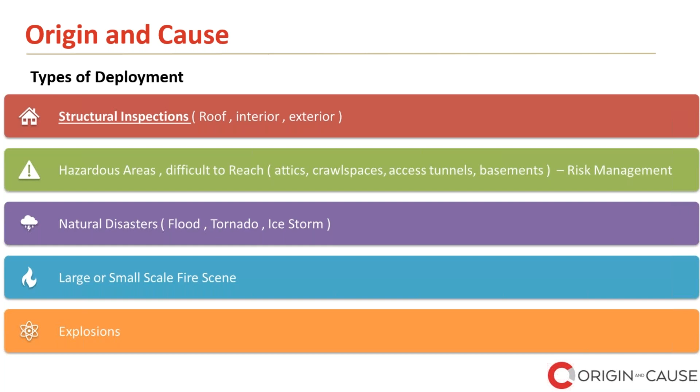Currently the regulations that Transport Canada governs drone use and drone pilots will expire as of June 1st. Things like special flight operation certificates will cease to exist for the most part, and the new regs kick in as of this Saturday, June 1st. Up until now, a typical drone operator was restricted from flying closer than 30 meters to people or building structures. It's very restrictive when dealing with a typical claim scenario.

If you have a commercial property that has a water infiltration on the roof, for example, you need to fly that roof line. It may be virtually impossible to not get within 30 meters of people. We have to get closer, and to do that, it might not be possible to get the shot with the current regulations. But as of June 1st, we'll talk about that in a second.

With the new regulations, there will be lifted restrictions for certain drones to fly within 5 meters of people, which really narrows down the radius around a structure. If you can imagine flying a system in an urban or built up area, downtown Toronto, for example, or downtown Ottawa, or any other urban centers, you may have the luxury of locking down that area with security personnel, but you may not. Therefore, deploying a drone with the old regs might not be possible - you might not be able to get your shot.

But as of June 1st, next week, the new requirements kick in with Transport Canada that place restrictions on the drone operators, separating basic operators from advanced operators. It also dictates what drones can fly within that lower rated, or closer than 30 meters of people, and up to 5 meters of people.

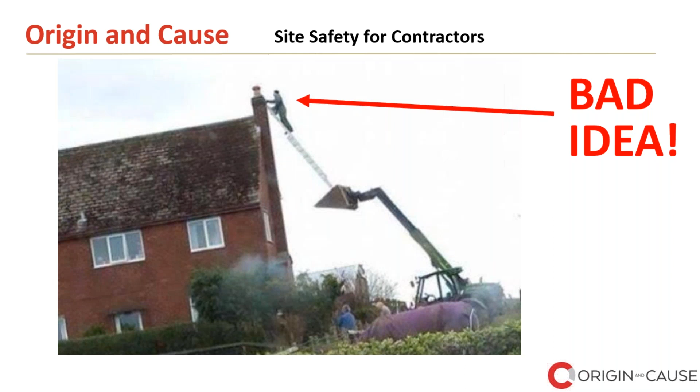Not saying that you're never going to climb again, drones are not the end all be all. However, they are a tool in your toolbox to get you up to a higher location to examine a structure. Is the mission worth the risk? That's always a question you have to ask yourself. So what's the best tool for the job? Is it too risky to climb out onto a roof line to get that picture, or go up in a cherry picker? Or would it be better suited to put a flight system up, i.e. our drone systems?

Contractors, highly recommend calling the drone operator. Once you've screened your drone operators and found the right individual for the job, the drone can be flown very close to structures, to the roof lines and otherwise inaccessible areas to determine damage and assist in the evaluations for the rebuilds. Drones can be flown up to a maximum altitude of 400 feet above the ground for overall site evaluation.

Construction firms have recently started implementing professional drones in routine safety inspections. Not only is this a safety measure clever for the use of drones in construction, but it's very time effective as well. Most commonly, health and safety risks are in hard to reach areas that normally construction workers would otherwise have trouble locating. Contractors have begun implementing professional drone operators to pinpoint and locate potential issues in a far more efficient manner, reducing the risk of climbing and gathering the needed site information in a fraction of the time.

What we've seen also with the jobs we've flown, the adjusters and contractors both really love us flying the sites for them in their claim process. Here's the most common feedback we've been getting from individuals: the fast turnaround of the inspection. Generally on site, once a flight is completed, we'll pull the data from the drone with the SD card and we can pop it into a laptop and review the video and or the digital images on site to make sure that we've captured exactly what you're looking for. Again, there's no delay in the post-processing of the data.

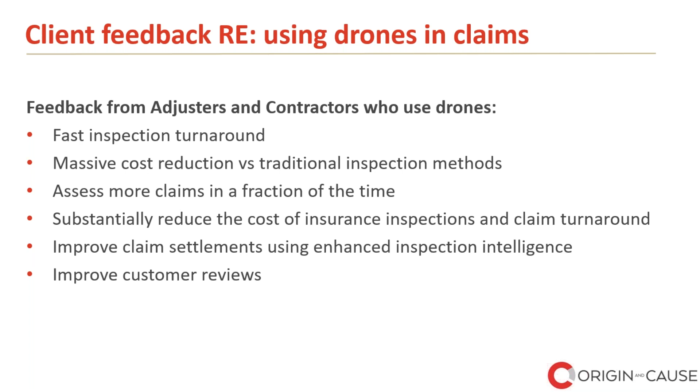All right, information that the drones can provide you. What can we get? What's the data? What are you looking for?

The software we use collects more than just pictures and videos of a scene. It's incredibly high quality images, up to 4K if needed, cinematic. Not that we're shooting a movie, but you certainly are not getting a grainy 720 photo or video. So the images are extremely high quality.

The drone deployment gets us to those hard to reach places, areas that assist adjusters in understanding the cause of the loss and verifying if there's coverage or not for a claim. It also accurately documents damage to help contractors and estimators with measurements for rebuild.

Every roof inspector, claim adjuster, and contractor can do the job from the safety of the ground. The software that we're using provides precise measurement and additional data to assist with the scoping and providing repair or rebuild estimates.

We automatically capture roof imagery in minutes. We can fly a systematic grid of a site to later render and recreate the scene, both in 2-dimensional and 3-dimensional modeling. I'll explain that in a minute.

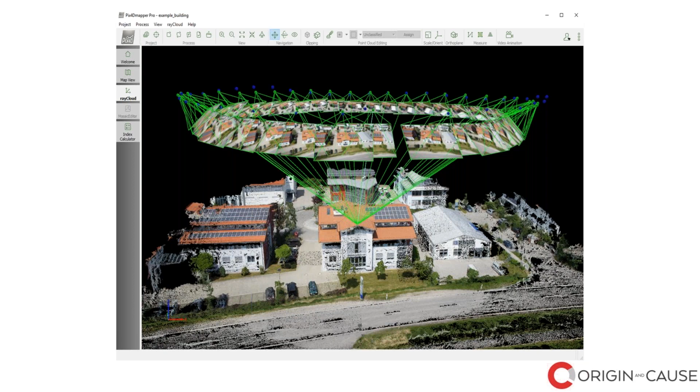So with this software that we're deploying, we're doing exactly that. Certainly in litigation, if a claim ever went there, we can reproduce this data as a time capsule of what the site looked like when we were conducting that flight. So the faster you can get us to a scene, the faster we can collect evidence, the faster we can preserve that evidence as well.

3D mapping, quickly touched on this, but again, it's very helpful and useful in large losses. We can move the model around, and we can review it off-site.

Again, in large losses such as construction claims or situations when the insured has a liability exposure, they want thoroughly documented cases. They want that evidence, so in case the claim goes to litigation, by capturing this in the 3D model we do exactly that. You have that site as it is, and 3 months or 3 years down the road, you can look back at this model and explain your case.

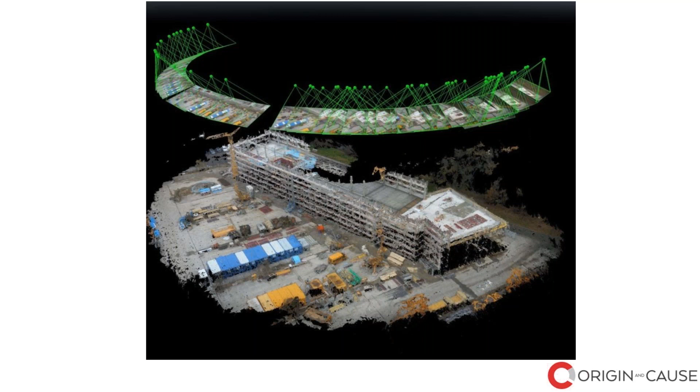Okay, a lot of questions and requests have come out about water claims and water damage, and how we can document that. Quite frankly, the thermal imaging has been a game changer for us.

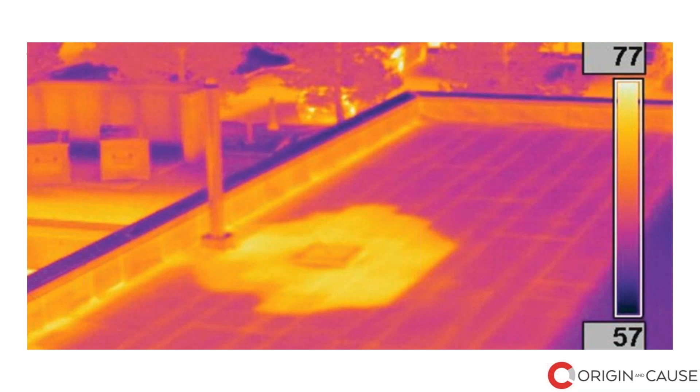A picture's worth 1,000 words. You can actually look at where water's penetrating in and around that drain and getting roof penetration. Without that photograph, you would not necessarily be able to determine the scope of that damage. This is typical of the thermal imaging we'd be employing.

I'm just going to play a video of an inspection. It's conducted by an aerial inspection filming service, and I think it really captures the essence of a claim and how we utilize both thermal and building inspection.

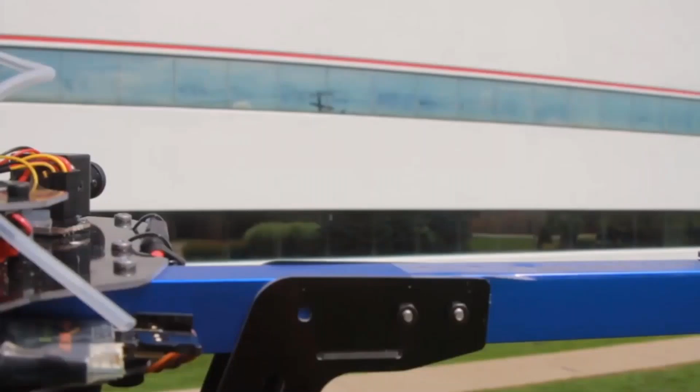It's a very large scale structure, as you can see. There was a report of water entering the interior of the structure, and a drone was employed to determine the area of penetration and the scope of the damage.

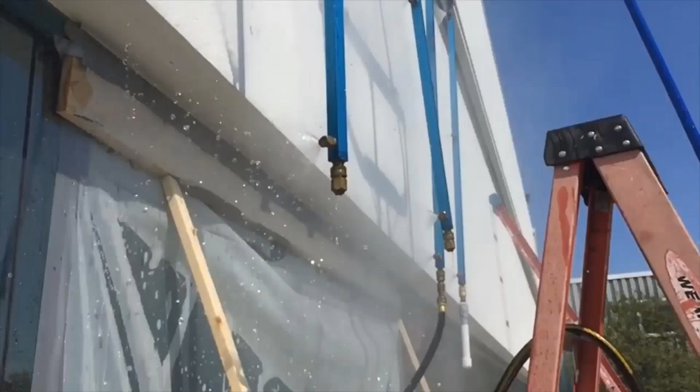Thermal imaging gives you a spectrum that enables the operator to determine where the hot spots and cold spots are. Damages were visible using this, and by using 3D modeling, it allowed us to recreate that building as it was. So we're not only using the 3D, we're using the thermal inspection. Some testing was done to look for the water penetration.

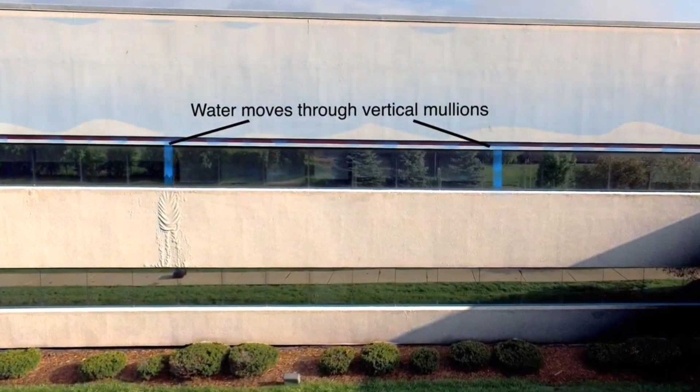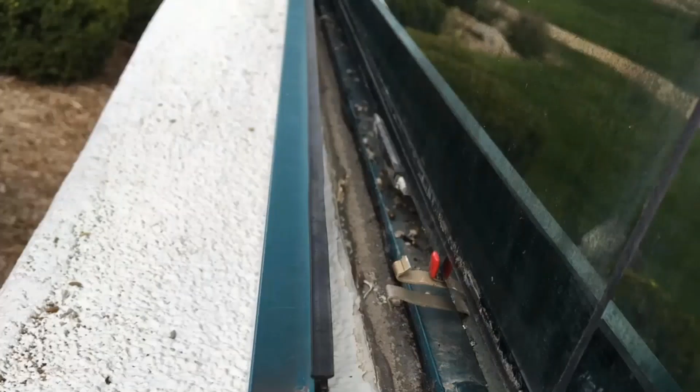And some of the findings - sometimes it's not so obvious where the water travels. With the thermals, we were actually able to determine the entry into the building and where it was pooling. This allowed the engineers to determine what risks or how much damage had actually occurred.

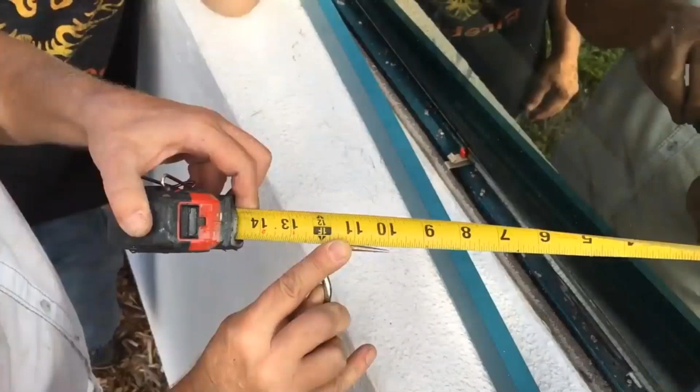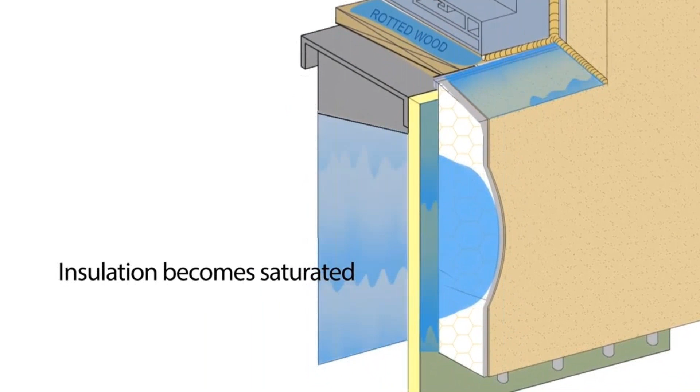The entry of the water to the structure was located, and the interior damage was also located. The extent of this damage was extensive, obviously.

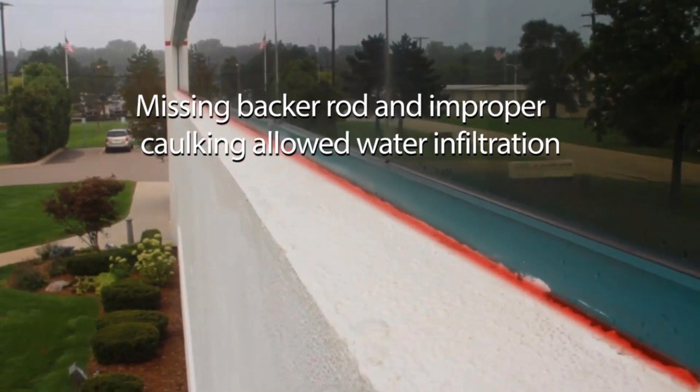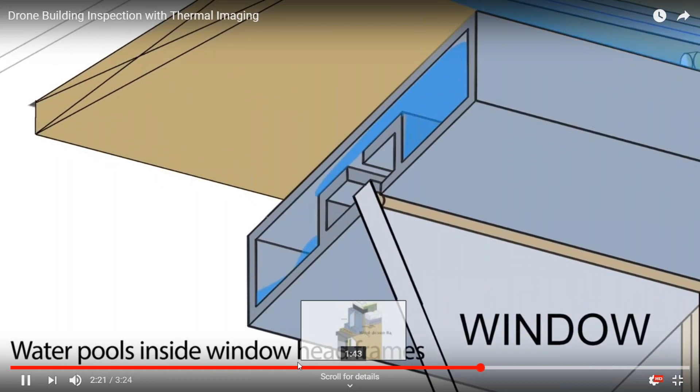Again, what's not necessarily visible here was the use of the thermal in the initial investigation. It brought the structural engineers into the location where the damage was occurring, which was far from where the water entry was actually occurring.

Again, the use of a drone on this scope of a structure, over 200,000 square feet, to physically inspect that structure would take a lot longer than it would with a drone. With the drone, the flight would be done in under half an hour. The thermal would readily show you cold spots and narrow down the area that was required to do the repair.

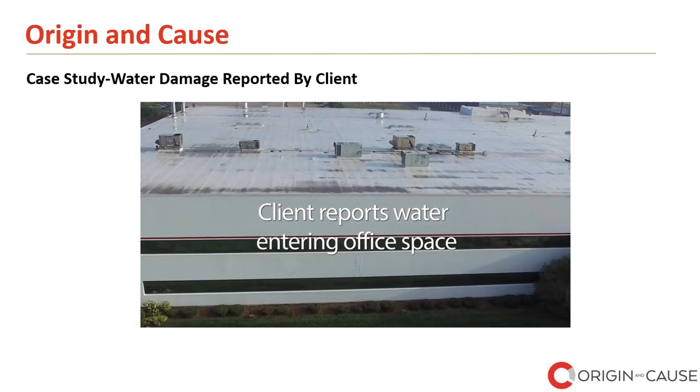Origin and cause can also put small drones into structures or small, hard to reach places. I've already talked about personnel risk and reduction of the risk to personnel. Again, a site may not be accessible to an adjuster.

It may not legally be allowed to get into the structure. So we can fly small interior drones into those hard to reach places, areas of a structure that would otherwise not be accessible by contractors and adjusters to look at a site. This includes attics, crawl spaces, access tunnels, flooded basements, electrical hazards, and chemical hazards.

Collapsed buildings can be flown to assess damage and discover where it would otherwise be unsafe to send an investigator or a structural engineer into. Risk to the attending team member is reduced by putting a machine where a person does not have to go.

Time is saved and efficiencies are identified through the technology deployment. There will be sites that the Ministry of Labor will restrict entry to a structure. Deploying a drone to collect your evidence - for example, I've been at a fire scene which was extremely hazardous to get into.

By putting a small system in, we're still able to collect data and capture that evidence at the scene without putting a person inside where it was unsafe to do so.

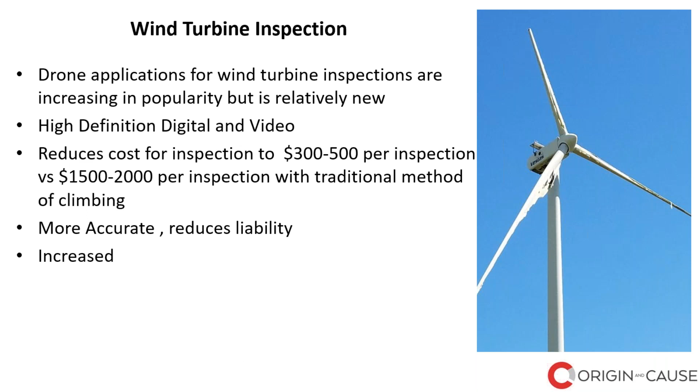This is an inspection of the Gestamp wind project in Punta Lima, Puerto Rico wind farm. It was built in 2013, and Hurricane Maria blew through in 2017.

It was a claim, and it was approved. It was a multi-million-dollar claim on these turbines.

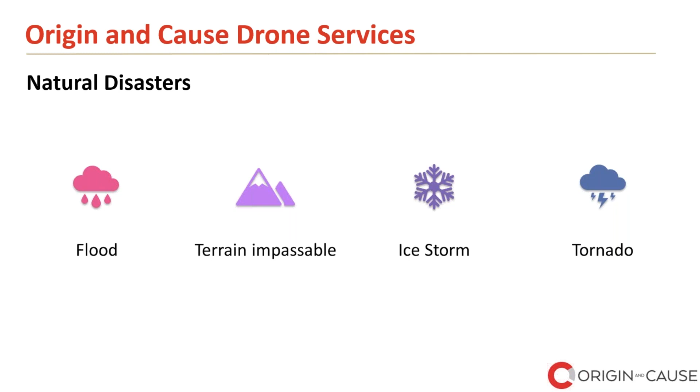This image, just a quick shot, gives you an overview. We've talked about CAT teams — there are individuals here for catastrophe teams that get deployed to the Southern Islands, the Caribbean, for example. This complex was insured, extensive damage occurred, and they wished to document it using drones. This was on the island of Antigua during Hurricane Irma, again in 2017.

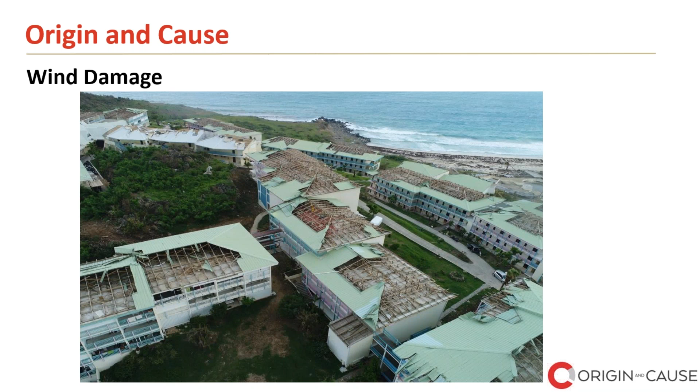Catastrophe teams are deployed to regions devastated by natural disasters. We're seeing increased use of drones with these deployed teams, providing more relevant claim information and greater aerial perspective. Situational awareness of the damage is higher using drones.

You're able to assess larger areas in a shorter time. The scope of the damage is managed in a much shorter period. We're better able to assess ground damage in real time for teams deployed to an area, and able to deploy resources where needed by flying over otherwise inaccessible areas. More structures are examined per day with drones, and the collection and flow of information at large scale is done in a shorter time.

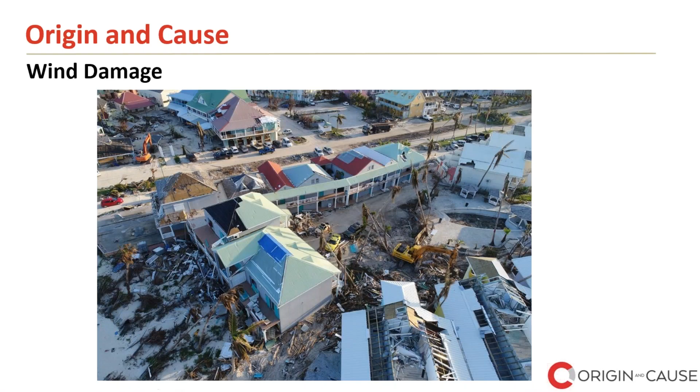This is an overflight again of the area from Hurricane Irma. If you put it in perspective of a tornado, you can see this is a hurricane, obviously, but in our region with a tornado, for example, the scope is massive. Drones will help insurance inspectors improve safety by gathering data in a more efficient manner and jumpstart efforts to rebuild the affected areas.

In this specific video, the area of Tortolla on the island of Antigua was hit. 95% of the buildings were damaged. So if you're deployed to an area that has massive damage, you want to get that information collected as quickly as possible for rebuilds.

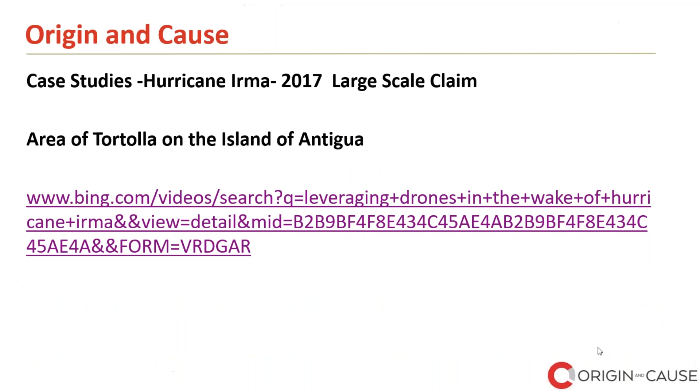Quickly, just like I mentioned, using the drones at fire scenes and claims, we do both large and small scale fires. It could be structural, small residential, and or large block fires. We've seen the request for both by deploying the drones.

Thorough inspection will cover the following areas. A drone can get to your roof. Your roof should be inspected for damages from burning embers or collapse if heat was extreme. The roof structure may be compromised, so you're not able to put boots on the roof, and you still need to get an inspection. There may be structural steel and or iron that's compromised.

It could be up high, destabilized. We can fly danger close to the structure and collect the video evidence. Stucco, siding, concrete damage, window frames melted, all require close-in inspection. Can't be done by boots on the ground. You'll have to get elevated. It may be, as I indicated, we talked about climbing ladders. However, this applies. We can fly the drone within inches of the structure and get the information and the data that's needed.

With regards to forest fires, in 2016 we used this approach, drone deployment to assess property in the path of a huge wildfire in Alberta, Canada, which burned through the town of Fort McMurray. I'm sure several adjusters here are well acquainted with this case study.

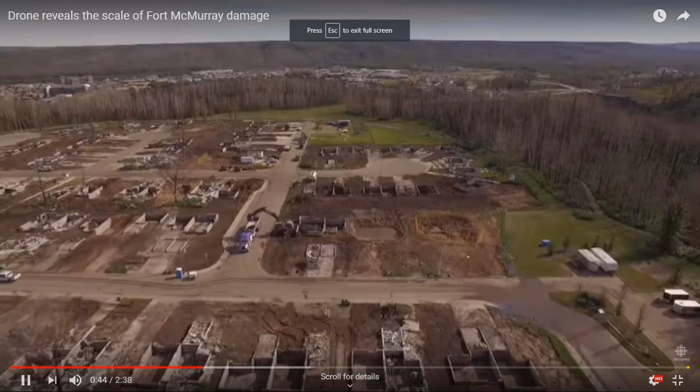We were able to review customers' claims in Fort McMurray just two days after the fires forced the town's evacuation, long before anyone could enter the site. It was possible to link pictures of the damage and cross-reference this with risk modeling and underwriting information. It also looked at the status of the evacuations and how quickly the fires were spreading by monitoring social media. This was an excerpt from a Zurich insurance adjuster.

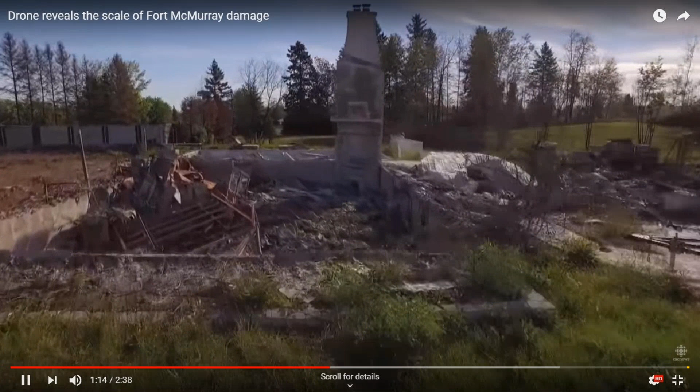Another excerpt was taken. Drones were used this way. They're essentially an extension of other types of visual assessments. For example, we regularly use a wealth of information about sites where there may be claims to do remote assessments long before we ever visit the site. This was from a State Farm adjuster.

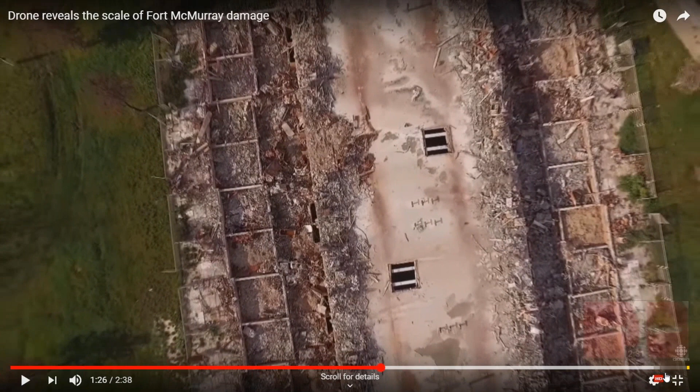So the deployment of the drones, as you can see, the scope was massive. The adjusters and the insurance companies were overwhelmed by claims. So by utilizing drones, it just reduced the scope of investigations.

Just quickly, want to wrap up, talk about some of our equipment. We're using state-of-the-art equipment, high resolution 4K video, and highly responsive aircraft. They are Transport Canada rated for advanced operations, cinema grade, very maneuverable, and able to fly virtually any site as required.

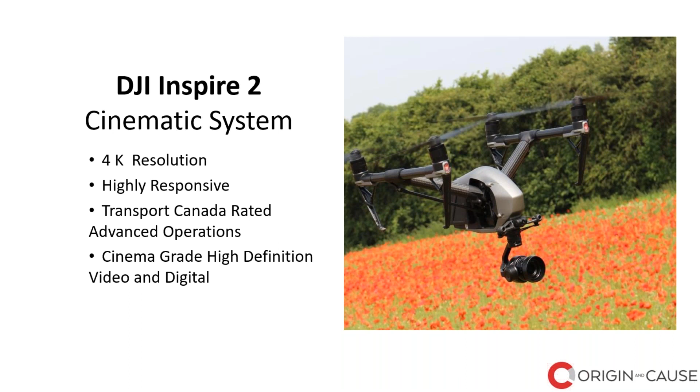Again, smaller drones are able to get into those hard to reach places. We are able to utilize those as well. We're using rugged all-weather inspection RPASs or drones, thermal imaging sensors. You've seen some samples of those. Zoom payloads, again, highly responsive, all Transport Canada rated for advanced operations.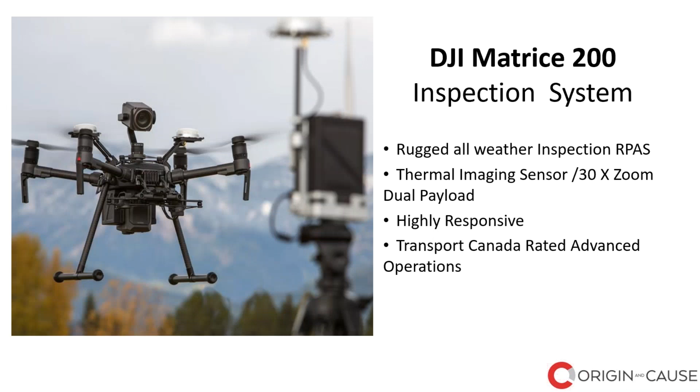Just a quick recap, some of the benefits of utilizing the drones. We can access hard to reach places, hard to reach locations, mitigating risks. They're cost effective. We can utilize infrared. We can reduce the risk to ground personnel on scene. We can assess a larger area in a shorter period of time. We can provide you with real-time data and transmit that from the site or reproduce at the site for your inspection and review.

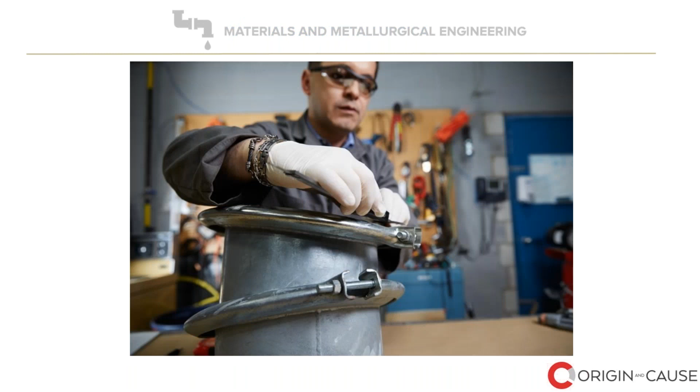And we have a chemical engineering group as well, and drone services, as we have been speaking about in this past hour, and forensic litigation services. So we lead the industry in forensic litigation experience, having been involved in over 1,500 legal cases and qualified as expert witnesses in all levels and types of Canadian courts. So this is truly a very popular service for us and for our clients to use.

Ask a question is commonly used too. Sometimes you don't know if you want to hire an engineer or a forensic expert, but you want to submit a quick question. We get to you right away with regards to that.

Also, I encourage you to go on our website to the resources section. You'll see articles that we push out on a monthly basis. They're very useful and simplified topics, technical topics, but designed to be very practical. Examples of articles include: 3 strategic advantages of involving a forensic expert in a fire case; evidence to the contrary, statements versus physical evidence; and appliance fires and floods.